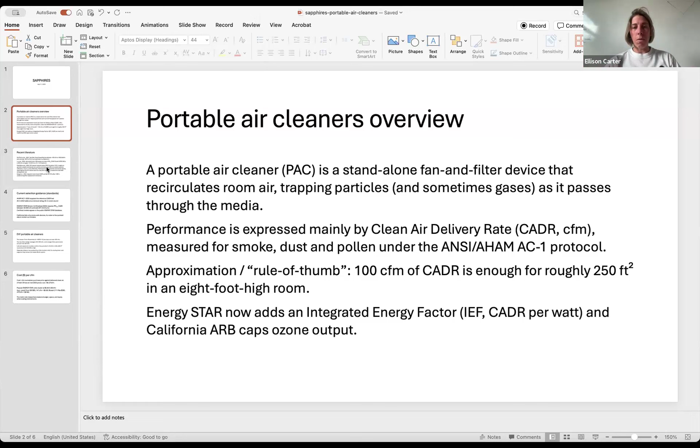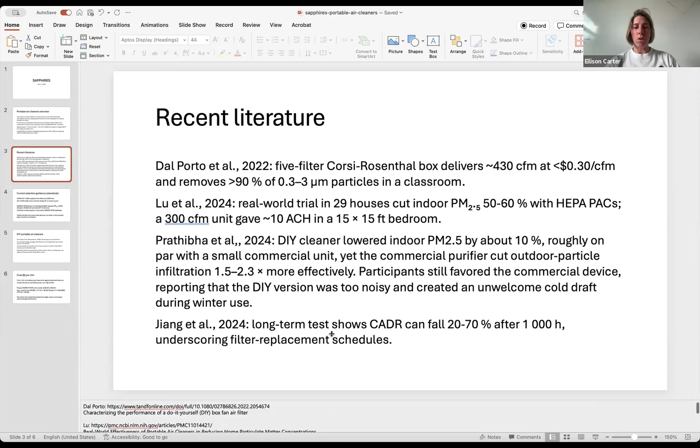Okay, there's probably more that could be said about how we define an air cleaner, but I'm just going to move on to some recent literature. This is a very text-heavy slide that I'm hoping people will just use as a reference in the future. I pulled papers that came out in the last 3 years—these are just a few.

Their titles are down here, I think are worth saying a little bit. One was characterizing the performance of a do-it-yourself box fan air filter.

One was real-world effectiveness of portable air cleaners in reducing home particulate matter concentrations. The first one helps you understand how these box fan filters are characterized, and how a DIY one is characterized is very similar to how you might characterize a commercially available one.

If you want to see what people have learned in the last few years about real world effectiveness, that's what this Lu et al. paper covers - their real world trial was in 29 homes. PM 2.5 was reduced by about 50 to 60% with these HEPA, high efficiency particulate air portable air cleaners.

They have a 300 CFM unit that was equivalent to about a 10 ACH, or air changes per hour, in a 15 by 15 foot bedroom. Pretty big, I think. But it shows you can cut PM 2.5 concentrations pretty considerably, 50 to 60%. Of course, it matters what your starting point is.

Usage and impact of do-it-yourself air cleaners in a smoke-impacted community. The reason I highlighted this one is because I actually think this was interesting to see. Participants favored commercial devices over DIY devices because of noise and the unwelcome cold draft during winter use.

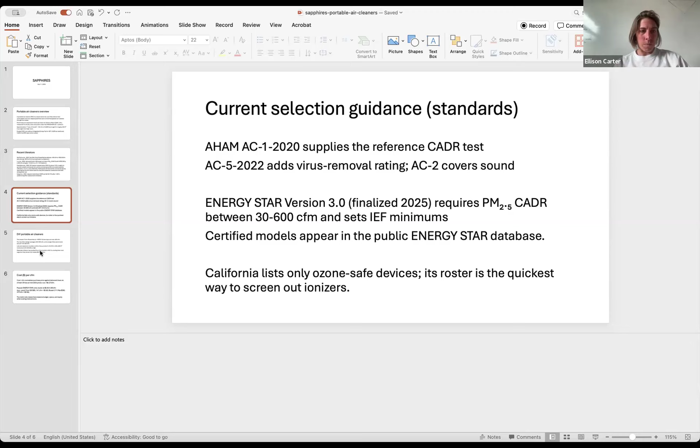Commercial portable air cleaners stand in contrast - not major contrast, but I think there are two threads here: commercially available ones, and DIY portable air cleaners. Those came onto the scene because they were quite a bit cheaper in the initial reverberations of the COVID pandemic. Buying one, two, or four filters and taping them basically to a box fan was certainly cheaper, and you could do it that day - you could go to Home Depot, buy a box fan and some filters, and tape it together.

I think there was a degree to which people valued the immediacy of being responsive to their own conditions, and that was bolstered by the Corsi Rosenthal box, which came from Dr. Rich Corsi and Jim Rosenthal, who put out designs for four filters - it's a cube with a box fan. There are lots of resources you can find on how to build this for yourself, and it does really well.

It was delivering a high CADR, and on a per dollar basis, it was out-competing commercially available filters. As costs of supplies have risen over the last three years, and the cost of commercial portable air cleaners have dropped or at least stabilized because of competition, I don't think the gap is as large in terms of cost. There's also added downsides of noise and people being unclear about filter replacement and what the savings actually are over, say, a year of operation. I haven't worked out numbers lately, so I don't know.

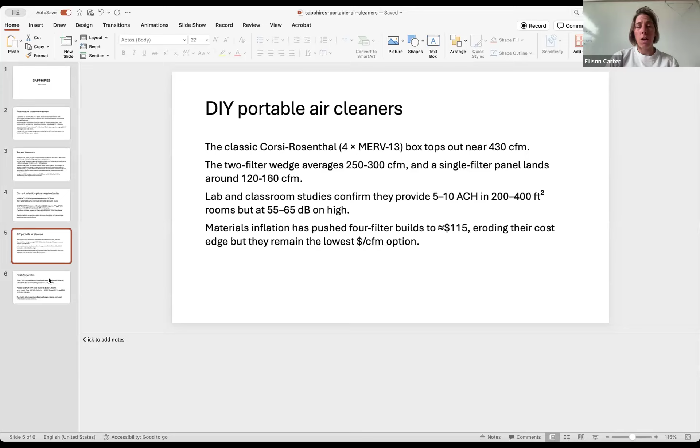There are versions that are single filters, so you just put the filter on the box fan, or two filters, so it's like a wedge shape in the box fan. Those deliver less clean air, their CADR is lower than a 4 filter version, but they may still suffice for the size of room you're trying to treat. So in some studies, they've been presented as a reasonable entry-level cost option.

This is just to give you an idea of what those actual costs are. These I pulled earlier this week. The cost per CFM normalizes price against delivered clean air, and for a fresh Corsi-Rosenthal box - that's the cube with a box fan on one face and at least MERV 13 or better filters for removing particles - in 2025 it's around 25 cents per CFM.

For popular Energy Star units, if you go to the Energy Star database and look for units based on dollar per CFM, where CFM is clean air delivered CFM - these are a few brands, the Levoit and the Blueair, there are many out there. I'm not promoting these, but just to give you an idea, it's about 60 cents per CFM.

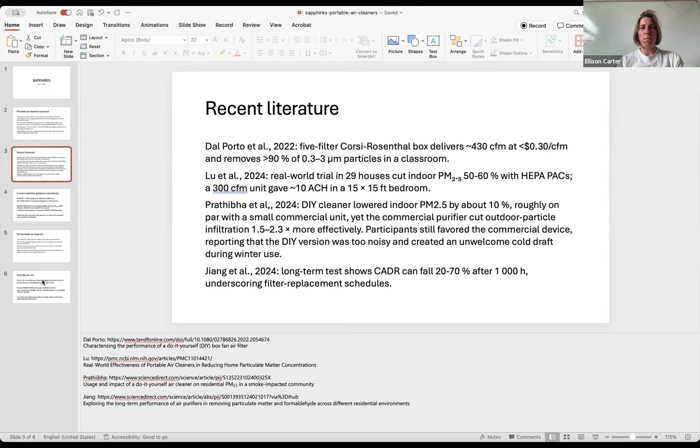I would say the available databases are pretty good for getting the cost and performance, the reported CADR. There's some evidence in the literature, which is why I'd highlighted that CADR goes down with time, so that's worth considering. The CADR is also going to be different depending on what you're trying to remove. In most of our conversations in this project, we've thought about smoke, but we could also think about dust or pollen, although dust and pollen aren't really the major heavy hitters in terms of what's infiltrating from outdoor events. So I still think smoke's the worthwhile CADR to think about.

So hopefully, if you didn't know these features about portable air cleaners already, this gives you a few thoughts to consider. I think commercial versus DIY is one distinction to keep in mind. CADR is a good metric to be familiar with. If you want to know more about how it's constructed, there are resources to show how that performance is assessed. It's a useful metric to normalize against cost or energy use, and to compare DIY to commercially available cleaners.

Almost all of this information is readily accessible by anyone, so people in our study would be able to go online and compare what they're getting or different things they might want to get. I think being familiar with the kind of information they would encounter if they were searching for this stuff online themselves is useful.

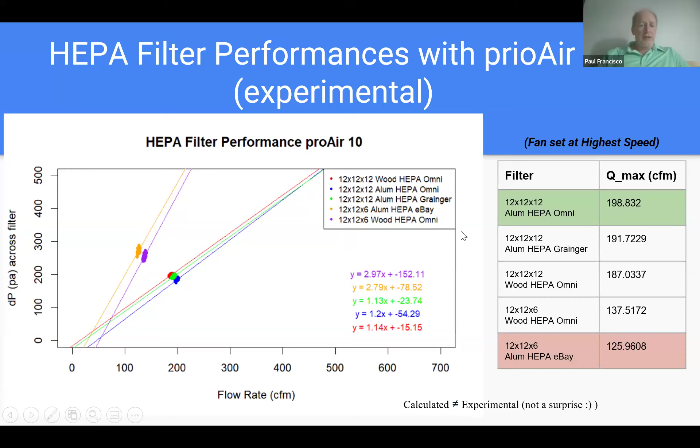But so there's still a question. If the fan only moves about 200 CFM, then if a house has more than about 100 CFM of infiltration — I'm just going to assume no wind, so it's stack effect only — it can only pressurize fully a house with about half of the CFM of the fan. So we're only able to do about 100. That's still going to be more than a lot of homes, but it's going to fall short in many homes, at least under colder conditions. So then the question is, how much benefit do we get if we can't fully pressurize the house? Is it still worth doing?

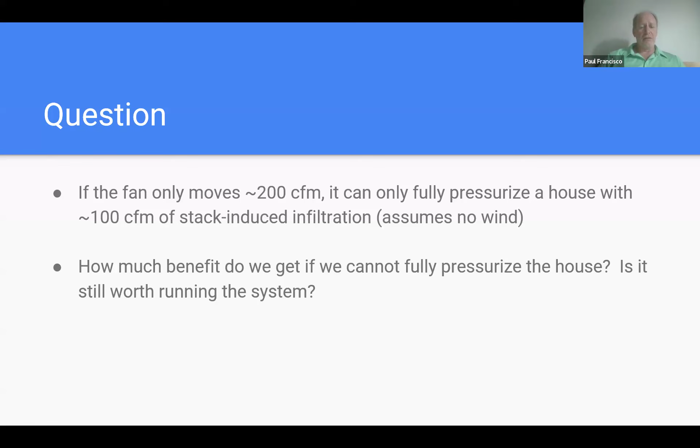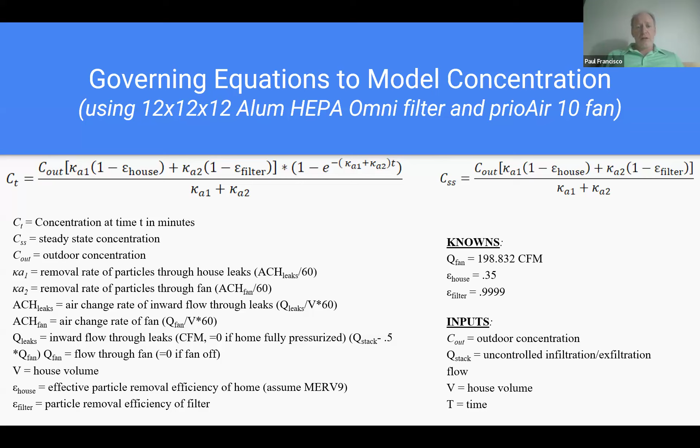We are assuming that the house is about MERV 9. Ellison talked about MERV 13 for the DIY boxes. MERV 9 is nowhere near as effective on filtering particles. That is the rating you get if you get about 65% of particles in the 1 to 3 micron range, and there really isn't any meaningful removal of less than 1 micron. But we're going to focus here on the 1 to 3 microns because we know if you don't have meaningful removal of under 1, then whatever we do is better. So we're going to focus on the 1 to 3s with a removal efficiency of about 65%.

So this is how it turns out. This on the y-axis, that is the fraction — like if we run the fan and filter, what is the fraction of the indoor concentration? Like if we didn't have that, what would the concentration be? And then what fraction of that do we have by running the fan and filter?

Now we have a number of cases here. These different lines correspond to different infiltration rates. So anything that's up to about 100 — so that's all these ones down to zero — anything up to about 100 CFM of infiltration, we're able to fully pressurize. And so because we're able to fully pressurize, we're getting everything.

Then as we go to 120, 140, 160, 180, and 200, what happens? What we see is that even at steady state, we're at about 35% of what we would have had if we did not have the fan running, even when the house is twice as leaky as it would be as we can fully pressurize. So when the house leakiness is equal to the fan flow, we're still reducing the concentration indoors by about 2/3 at steady state.

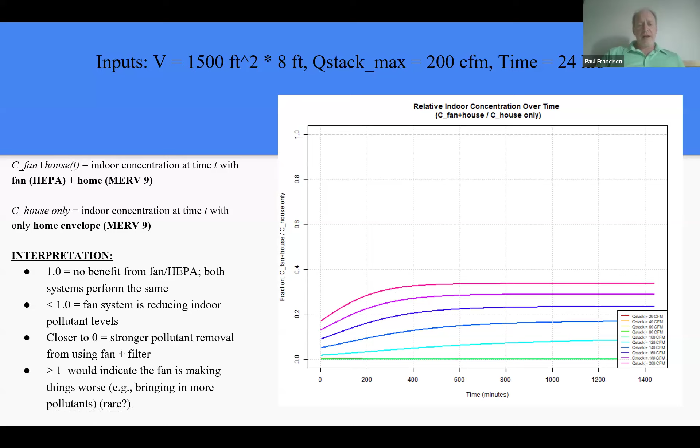And this is in minutes, so this is 1 day worth of simulation. It takes about 6 hours to get to steady state, maybe a little bit longer, and then it stays that way through the rest of the time. So what we're seeing is that relative to just a house only, we're still able to get a significant amount of reduction. This is where we actually went up to 400 CFM for stack infiltration. That's a really, really leaky house on a very, very cold day. You don't see that very much, but let's look at the kind of extremes. Even with that, we're able to reduce the concentration by about 40%.

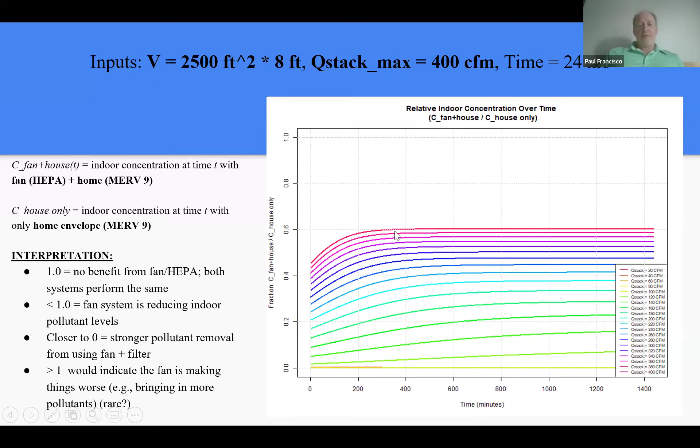That was independent really of the outdoor concentration because it does scale, but it's really based on the ratio of the uncontrolled infiltration, the fan flow, and it's considering the house volume and time. So really what we found was that we can get up to about 200 CFM with the best combination of filter and fan, and that we're able to get a significant amount of filtering out of that.

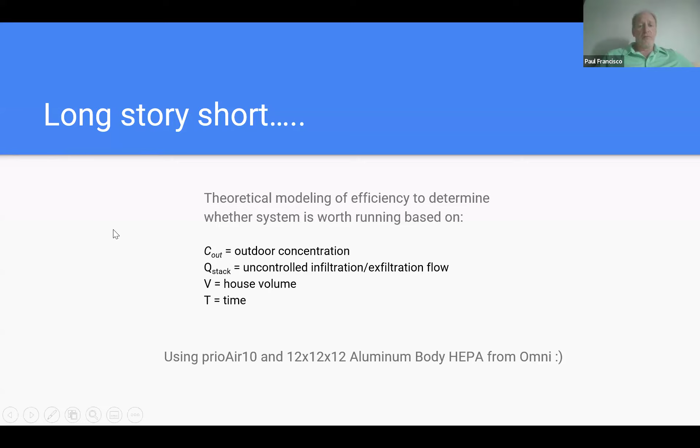One of the things we talked about but didn't put a slide in is that the cost of running the system and the durability seem good enough that we should just run it. If there's an indication, even if it's really cold outside and we can't fully pressurize, we should just run it and get whatever we can. It will be a noticeable improvement. Sometimes maybe it won't have been enough, but overall it should be a benefit much more frequently than not.

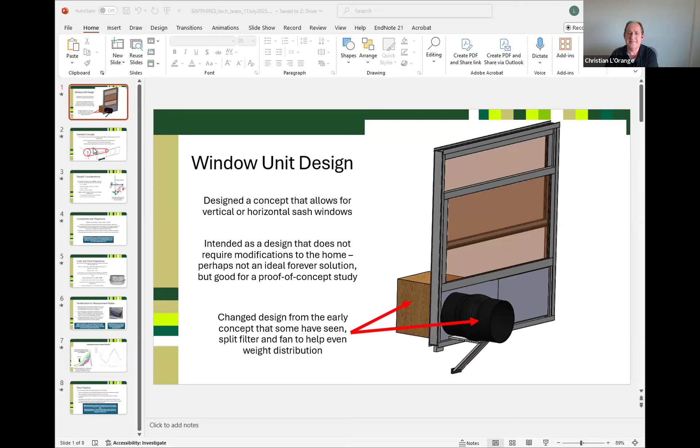We've been working on making this design appropriate for both vertical sash and horizontal sash windows. The prototype we've done so far uses sheet metal with a hemmed edge for each of these. These are commonly made features on sheet metal, so they're super cheap to make. We hem one component slightly larger, which allows our unit—where the blower and fan go through—to slide with the other parts. This is what allows us to expand and contract the width or height of the system to accommodate different people's windows.

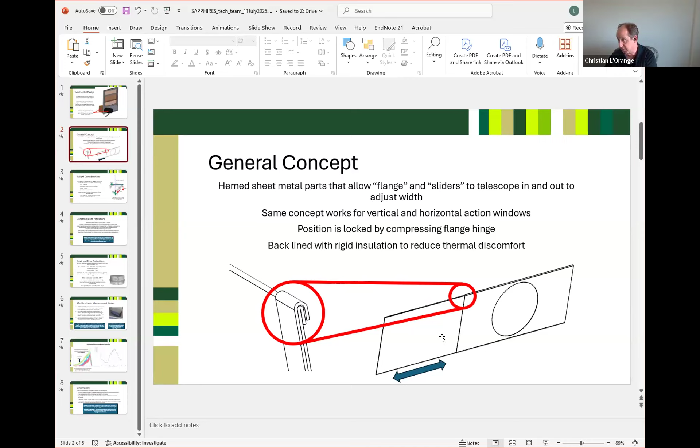With a simple sheet metal hand tool, you can actually crimp these two hems together, and they are shockingly well held together. This means we wouldn't need screwdrivers, rivets, drills, or any of those things. We would go to each home, slide to the right size, crimp, and move on. So far that's worked pretty well on the prototypes. We'll probably back-line this metal with some foam, which isn't the most aesthetically pleasing—one reason we probably wouldn't do this as a long-term product—but it helps on the temperature comfort side of things, since it's not just a thin sheet of metal.

One of the biggest challenges is weight management, because these fans and filters are not super light on their own. So what we've been working with are these support arms used for air conditioning units. They're designed to hold, in some cases, over 100 pounds. They've been working pretty well for our concept so far.

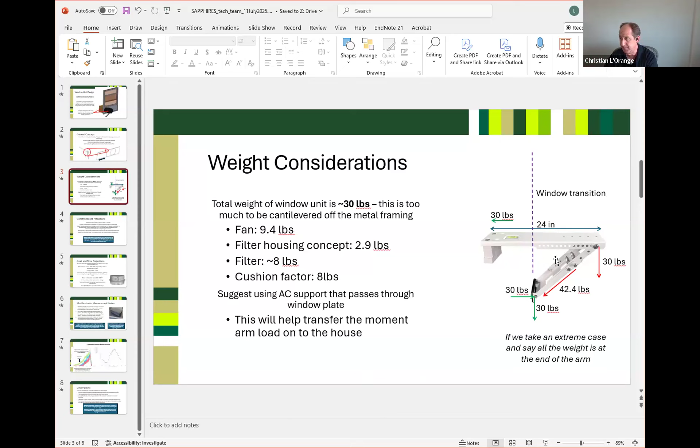The concept is that one side goes inside the house. We have the window transition, and then a counter arm that comes down and acts as a lever to help distribute the load. Being really conservative with our numbers, rounding everything up, using the heaviest filter I could find in Paul's lab, and adding a 30% safety margin, we end up at about 30 pounds that we need to account for—light for this sort of balance arm, but heavy enough that we need something to help support it. These arms are pretty cheap, about $20, and so far have worked quite well. This transitions through that sheet metal part I was showing before.

Some constraints on the design as it stands right now: we need to be able to open the window at least 11 inches, and it has to be a sliding window. A crank open kind of pivoting window does not work with this design. You have to be able to fully open it, which is a downside.

As I've designed it right now, the maximum we'd be able to fill the space on is 48 inches, but we'd be able to modify that if needed. I haven't updated this slide since I showed it to the tech team, but we've modified the design a little so there's actually pressure ports and power pass-through on these sheet metal parts. So we can use this window shield for taking measurements inside and outside the house, moving power to the right places, all of those things.

I do have one request for the team: if you could go to your house at some point and measure windows you have that might be appropriate for a design like this. This isn't a commitment for letting me install one in your home, just to get some reasonable sizes of windows to make sure we're covering enough of a range with this design. I don't want to undersize something and not make it appropriate for what we might need to do.

Thank you, Will, for already sending over your numbers. That was hugely helpful, and I actually made some design changes because of that. So thank you for that. But if others wouldn't mind doing the same thing for me, that would be hugely helpful. If you're not sure what I'm asking for, I'm happy to send you a photo of the specific dimensions I'm seeking.

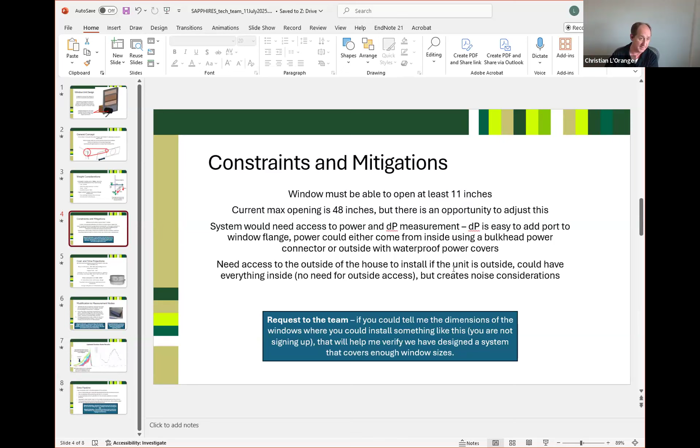I found some nice adapter flanges to go through these sheet metals to actually connect to the duct and to the fan. That was one of the outstanding items from the last time the tech team met. Danny was looking at 3D printed options, which I still think might work in some cases, but I've found off-the-shelf parts that will work for our transitions as well, which is what I've been doing so far.

I did a first verification design and it worked pretty darn well, but I was a little too optimistic on the stiffness of the metal. So I'm making a new one now that's just a little bit thicker with a little bit looser tolerancing on those hems, just to make my life easier. So far I've been making these by hand in the powerhouse basement, which is not a great thing to do for the whole study, but at least it allows us to go quickly on prototyping.

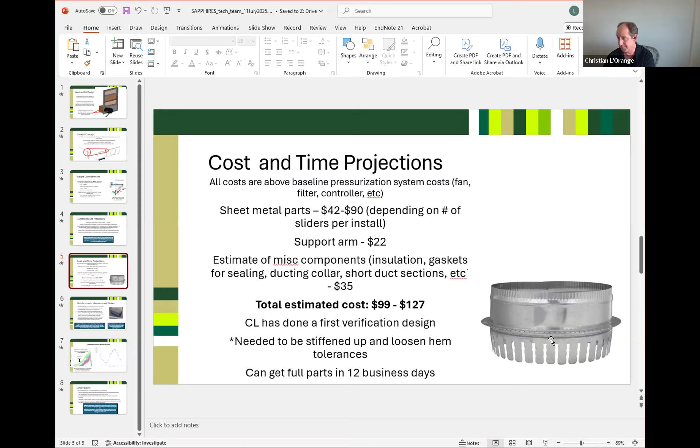The prices I've quoted here are using a fabrication house to make the parts, so I think they're pretty realistic costs. I'm going to move on to a couple of the other components for the sake of time, and then I'm happy to jump back to these if there are questions. I also see there's some things in the chat, but I can't look at both at the same time.

We've been making some modifications to the measurement nodes - these are the boxes we've been sending out to houses - to address some of the concerns that were raised. The first is dealing with the temperature. As several of you saw, the temperatures were elevated in these boxes because of the heat coming off the circuit boards. We've revised the housing design and added fans to do a lot better there. I'll show some data on that here in a bit.

We also identified why I think some of the units were reading very low PM and probably not responding to some of the spikes that might have existed. We found a bug in the code where, with the right combination of things, we ended up in a kind of death spiral, and it never actually signaled to the filter that it should turn on. So that also seems to have been addressed, but we'll talk about some upcoming testing.

I made modifications to our pressure measurements so that the circuitry has all the functionality to measure both differential pressure across the home envelope, which we need to actually run the system, and also a parallel pressure sensor in place if we want one across the filter or across other parts of our system. I can get up to 2 differential pressure measurements on the circuit right now; anything past that, we'll have to use 2 nodes.

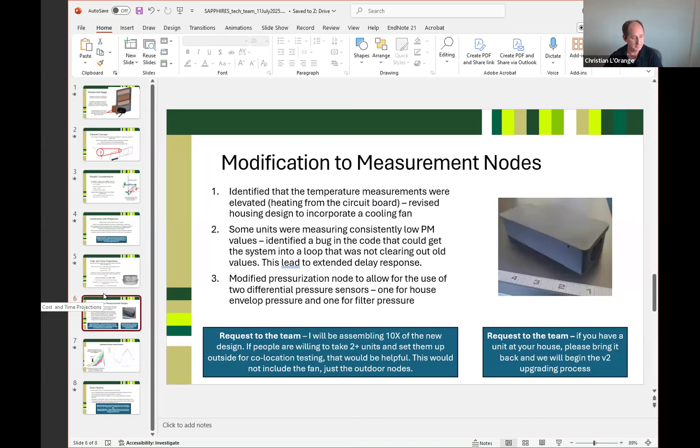The first is if people would be willing to take some of these outdoor measurement nodes in the next couple of weeks, that would be great. I've updated them. I'm not quite ready to send filters back out to people's houses, but these should have the fixed PM measurements and the fixed temperature things.

So it'd be good to get some more in other people's hands. The only downside is if I give you that and not the full system, you won't be able to see the values, but at least it will get logged.

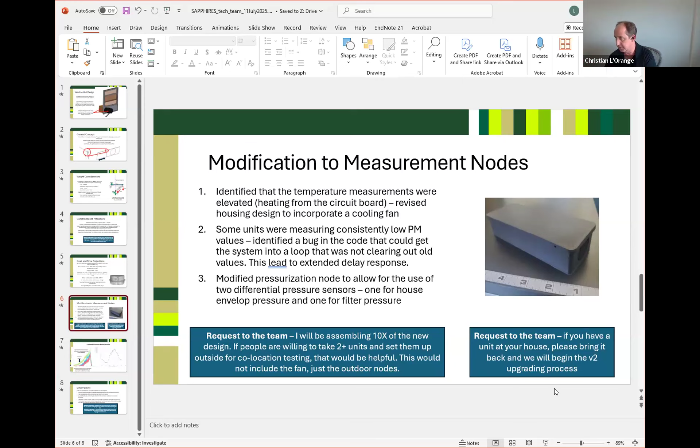The second is if you have one of the filter units in your house, if you wouldn't mind bringing it back sometime in the next couple of weeks, I think we're ready to upgrade those, make some fixes and improvements from the first round of testing. So either drop it off or let me know, and I'll come by with the vehicle and pick them up. I think we're ready to roll these upgrades out into a testing situation.

We'll talk about 2 sets of data that we did as validation. We'll talk about the pretty plot that I actually put some time into, and then the ugly plot after that. The plot on the left is the PM sensor we're using, which is a fairly low cost sensor compared to a laboratory grade reference measurement.

All of the neon bright colors are co-located cheaper sensors. The green line is our reference sensor. These are fully uncorrected values, so we know they'll be slightly off because optical sensors are sensitive to the aerosol type, so we need to apply a calibration curve to them.

But we are pretty repeatably seeing about a 3, that should be micrograms per meter cubed. At these ultra low concentrations, it's just truncating and saying 0, which I think is why in some of these cleanish situations, we were always reporting 0.

But after that, we get a pretty good linearity. So we're actually updating the code to use both mass and particle count, since the sensor does both. I think we'll be able to recover those low range concentrations and do a little bit better down low. Happy to talk way more on that if somebody wants at some point, but that's a pretty nerdy conversation for another time.

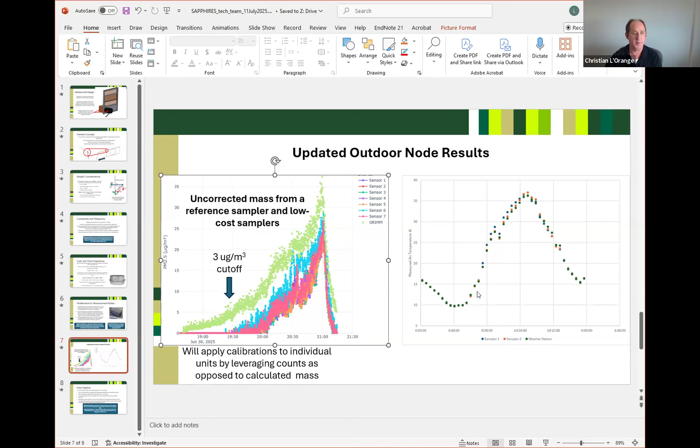One thing to note here, and something for us to think about as part of our installation, is keeping that outdoor node out of the sun. The fan is not strong enough right now to overcome enclosure heating from solar radiation. So that's probably a longer conversation about whether we can live with that, or if I need to go to a bigger fan, or if we add a solar shield. All things are doable, but with the ones we have right now, that's the extent of where we can get with our current fan.

And last, we have I'd say 95% working data pipeline for getting the data from houses to a point that people can actually use them. So the way the system works is data is collected by each node and transmitted to the central node. This is the touch screen. Then it gets stored there indefinitely.

When we are in close proximity, like in their house or driveway, we can wirelessly pull that data onto a laptop. The idea of using a phone to do this is looking a little less promising. The laptop with a wireless connection seems to work. We don't need access to the home's Wi-Fi network, we can just tap into the network we're generating internal to the sensors.

We pull that data, and then I've written a script that, when it finishes pulling, tries to push it to a database I've set up in our lab. So it can either push immediately, or when we get the laptop back to the computer or back to the lab, either way it will push data up.

But what this does allow us to do, if we want, is if laptops in the field have access to the internet, either because we have access to their home, or we use a hotspot type thing, or hotspot with our phones, we could push data immediately from the house to the database.

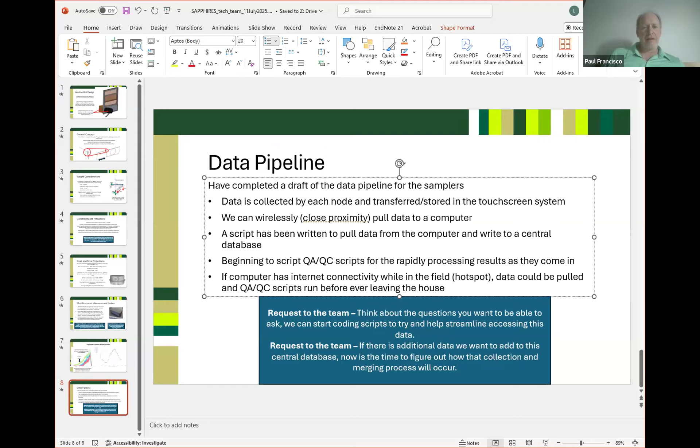I've dumped a bunch of stuff in chat which you guys can look at, but Christian, one of the things I've been pushing our team on is getting data from the field that we have now and integrating it rapidly, immediately upon download. So I'm not saying don't do this, but as long as you have a time series of data, it can already be sucked in.

That's great, yeah, I'm happy to do that. We could point the data to write to something else once we collect it. That works perfectly, because it might be that we have all the manometer data at high resolution already being read in, and I'm sure you're capable of integrating it, but that might just be extra work you don't need to do. Good.

To your question in the chat about data being in CSV format, or whether it still needs to be translated: that final push step is when I go from the database, which is easy if you're comfortable working with databases, to a more everyday, toss-in-Excel type format.

One of the challenges is that because everything's at slightly different time steps, there's a bit of syncing of data that we're doing during the data merging. That's what our code does already. So yeah, just give us anything. That's what I'm saying, like it's not synced.